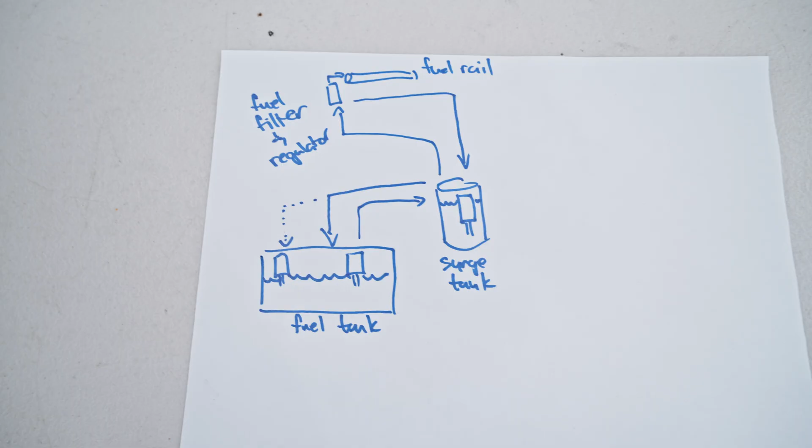So here's my quick diagram of what I'm trying to explain, how the surge tank kind of helps with the fuel cut issue. So pretend this is your main fuel tank, and this little water line is the fuel.

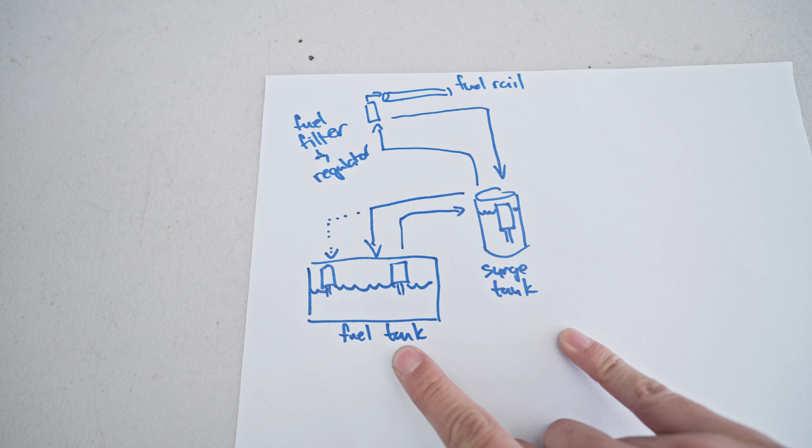That's fine and probably where it's sitting when you're static, but you can imagine if the fuel is lower and/or you're having high G forces left and right, that fuel kind of gets pushed to one side or the other. So these little boxes here are supposed to be fuel pumps.

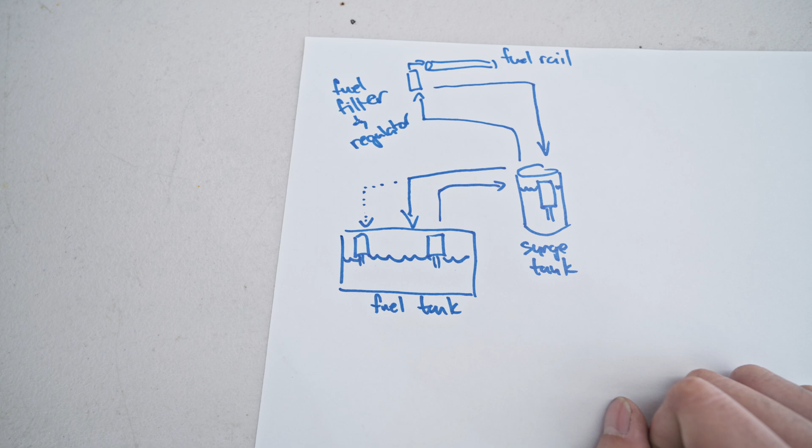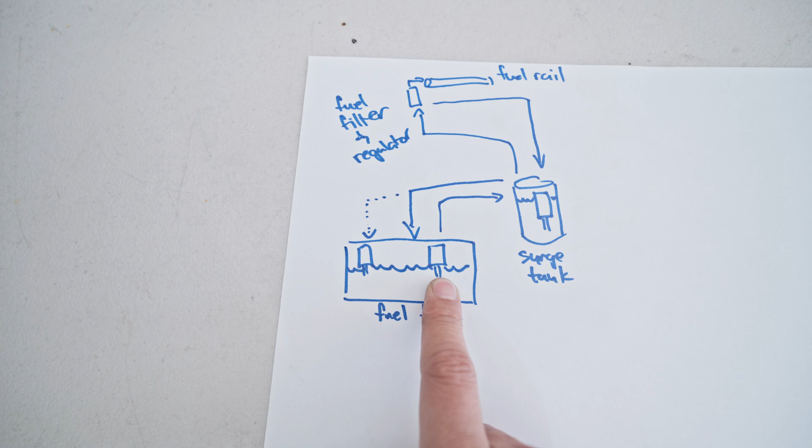Again, say if I make a hard right turn, all the fuel goes to this side, and then you may be at risk for not having any fuel supply to your main pump.

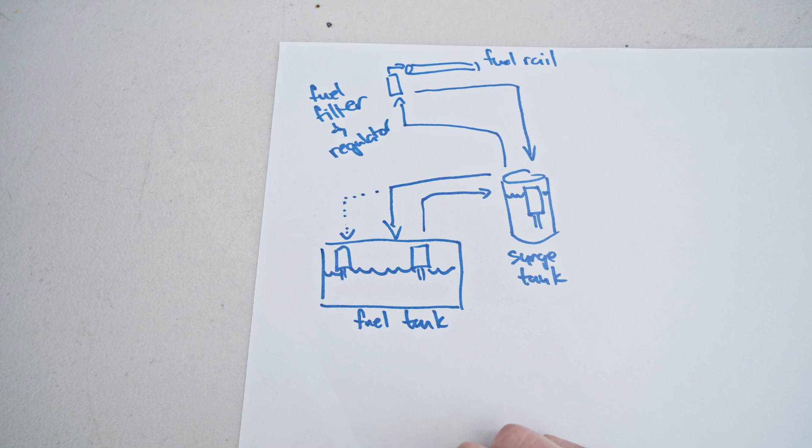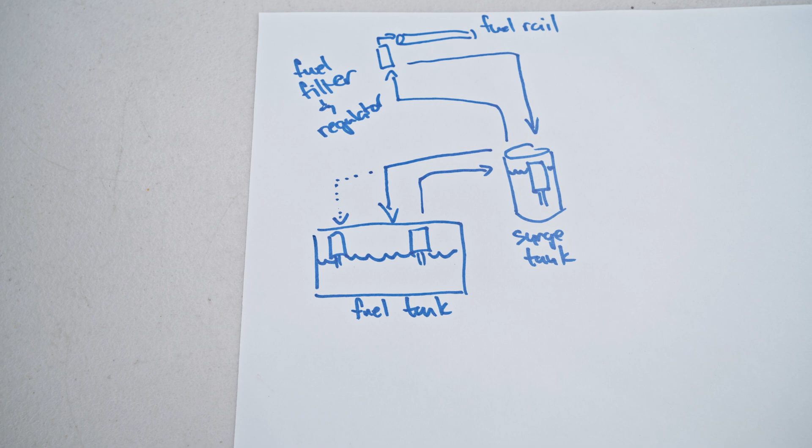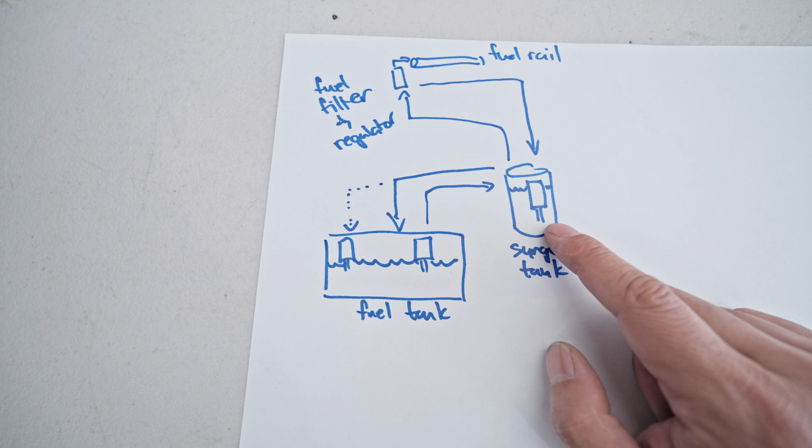So here I have the surge tank. You can see, from the previous videos and probably today as well, that it's a narrow — this is not to size, by the way — kind of container.

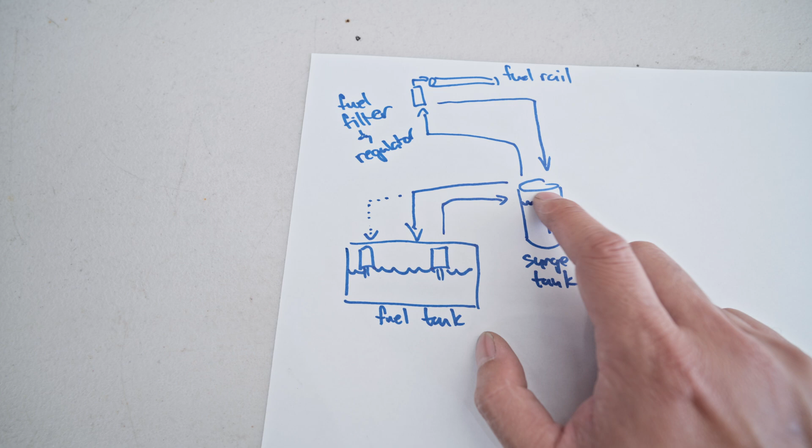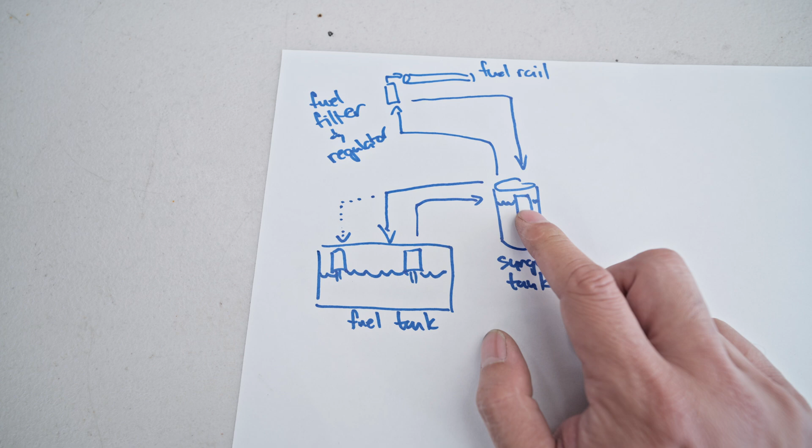And so if the fuel line or level is at the top, and since it's narrow, no matter how much G forces you move left and right, it kind of always has the fuel pump theoretically fully submerged, so you'll never be at risk for sucking up air or no fuel.

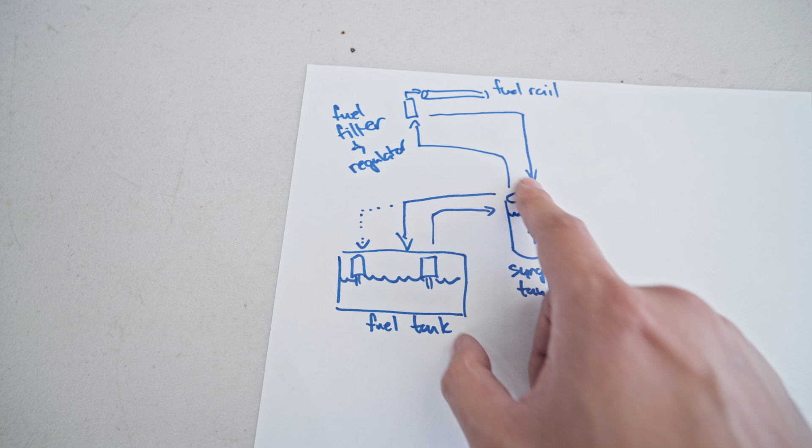So the whole fuel line system with the surge tank works like this: the fuel pump will instead deliver fuel to the surge tank. The surge tank will then deliver it to your motor through the fuel filter, regulator, and fuel rail. From the fuel pressure regulator, I believe the return line goes back to this surge tank.

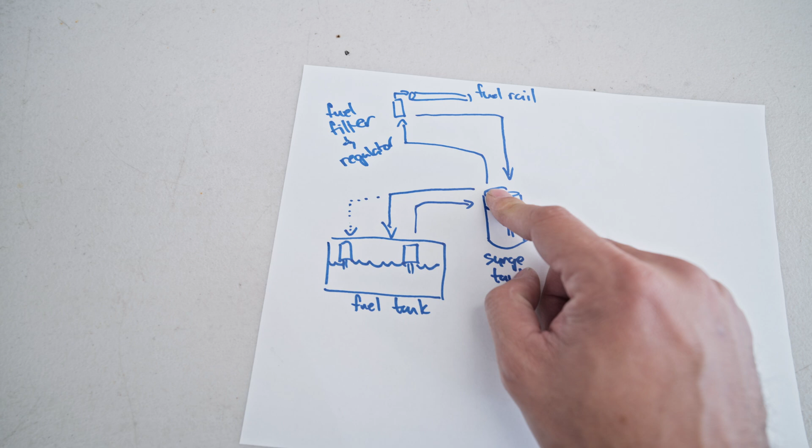Normally it would go back to your main tank. And so from the surge tank, there's an overfill or overflow port that goes back to your main tank here. That's why we have kind of like four ports on the surge tank that we got to plumb.

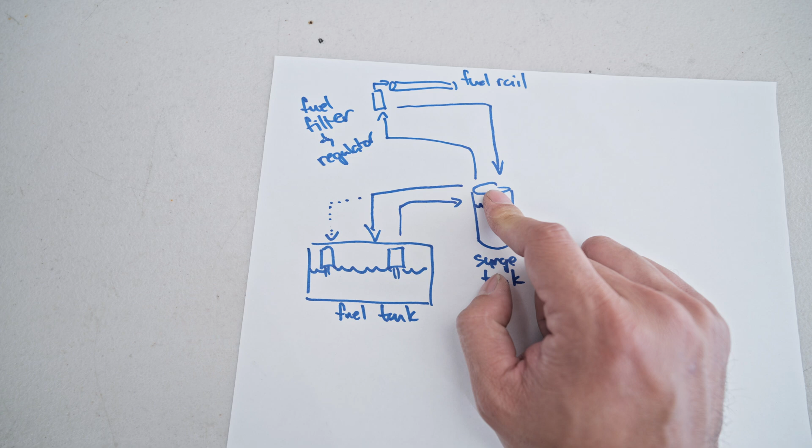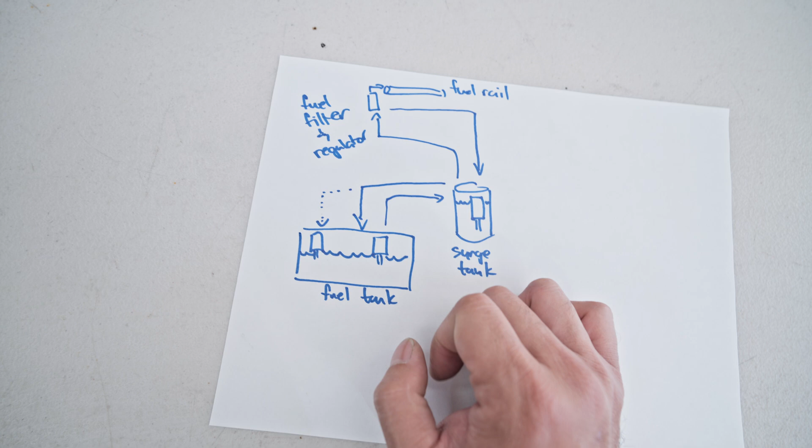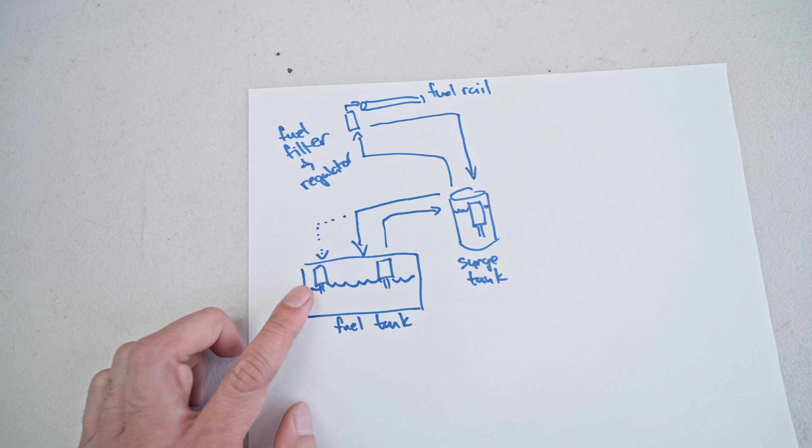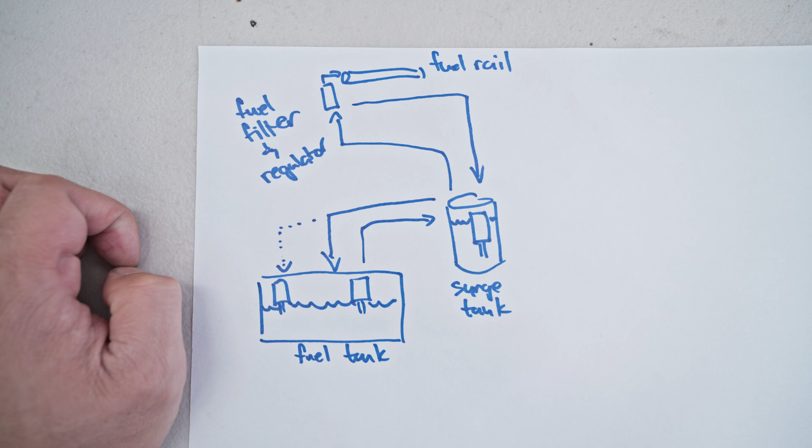But I believe the return or overflow from the surge tank might go over here. Not sure, but again, I'm not an expert — I've never installed a surge tank. I'm doing this out of necessity to try to avoid fuel cut on the track. But that's basically the idea.

So here is the cover for the surge tank. Here's the 4 ports that I was mentioning from the diagram. Kind of have it pre-assembled, not quite complete. I did buy this kit or the surge tank used, so not sure what it all comes with, but it should have everything I need to make this work.

So what I had to do, or where I'm at, is I bought a new fuel pump to match my existing one. I'm running a 450 liter per hour fuel pump. I think that fuel rate or fuel delivery is slightly higher than stock because I'm running E85, which demands a little more fuel flow.

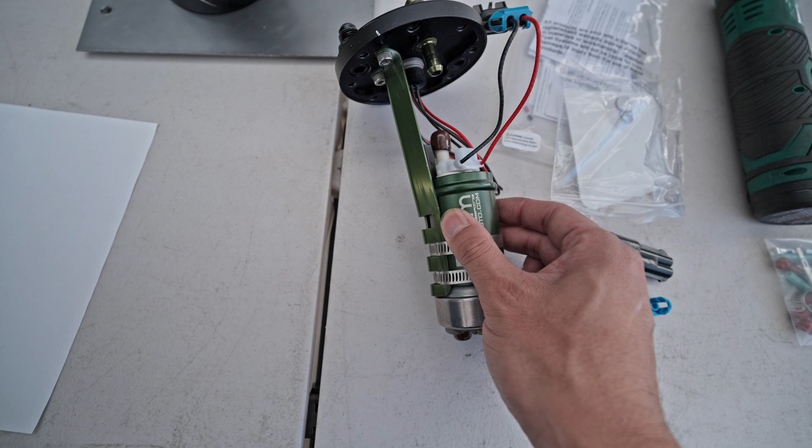So I got that already mounted. It looks kind of funny because for the fuel pump to be held onto this cover of the surge tank, it's by this little green piece here, I don't know what to call it. I put the fuel pump in the sleeve. I already had this in my parts bin, but basically the clamps hold the sleeve onto this piece that comes down, and this sleeve also compresses and kind of holds the pump from slipping out. So that's how the fuel pump is mounted.

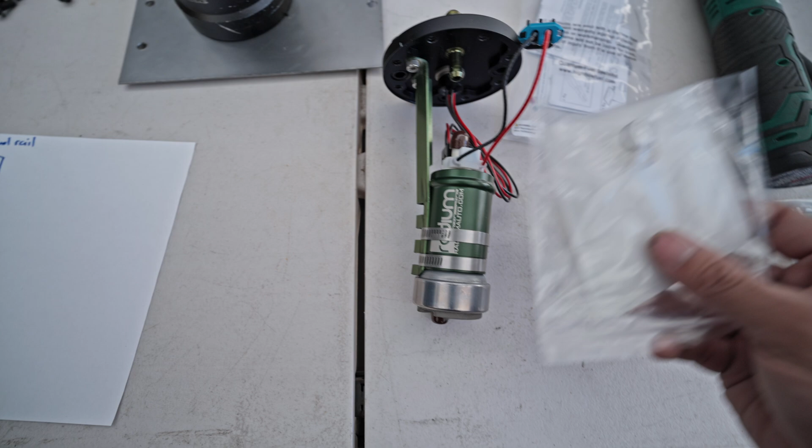So the fuel will get sucked in here. I need to put a fuel filter or fuel sock, I guess is what it's called, underneath here. Then I'm going to use one of the fuel lines that came with the kit, and the reason I want to use that is because this fuel pump is compatible with E85, and I'm assuming the fuel hose that it comes with does as well.

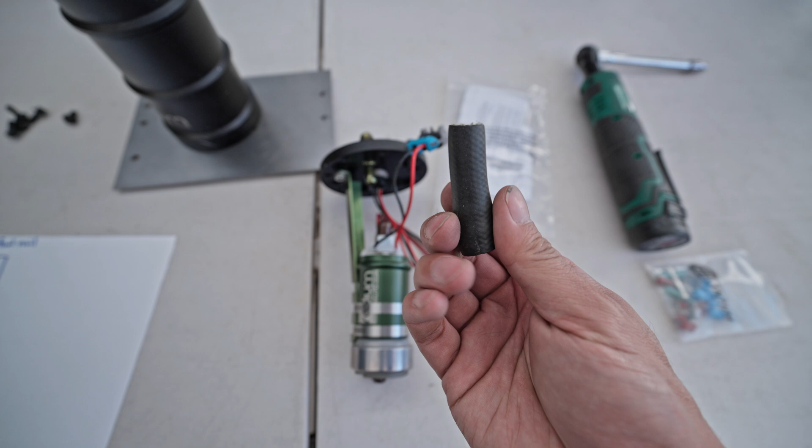If you don't have a fuel compatible E85 line, it basically gets super brittle. So this is the original hose that came from this kit when I bought it used, and the seller told me, hey, you should probably replace the fuel lines because they're not rated for E85, and over time it eats up this rubber fuel line.

So I'll have to put that on to there. That'll go from in between here to here, and then the port is what goes to the fuel filter. What else do I need to do?

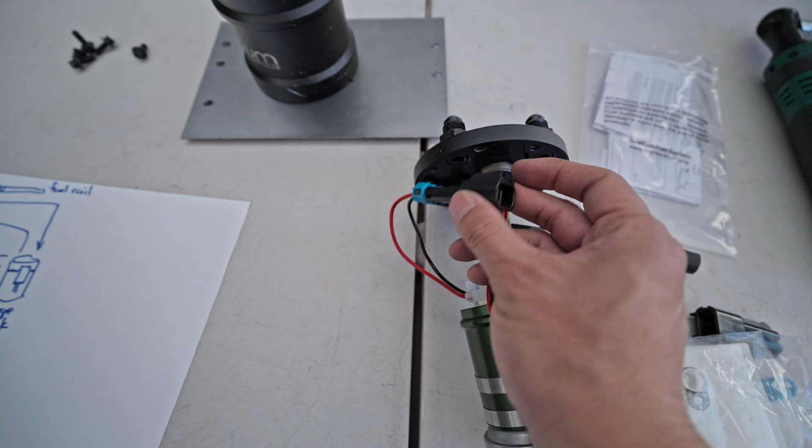Then I do need to splice and crimp some new connectors and harnesses. This connector that originally came with the kit is compatible for direct connection to the OEM fuel pump. I'm assuming when I bought it used, it was the OEM fuel pump, but the 450 liter per hour fuel pump has a different style connector.

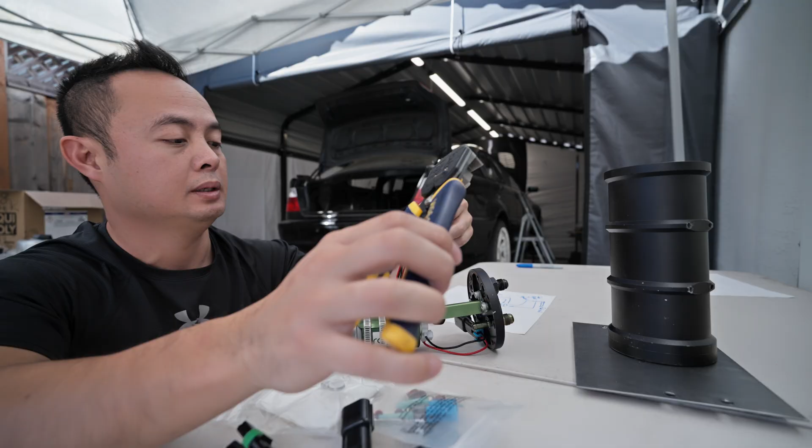So the kit did come with some connectors, so I'm going to cut this up, crimp some terminals, and put a compatible connector so it's kind of bolt-on to this. I mean, I could just splice it, I guess, but I'm trying to make this a clean install, and maybe the crimps are a little more reliable than just doing some butt connectors or whatnot. Don't want that failing during a track day. I hate cutting perfectly good harnesses, but it is what it is.

So this harness actually has 2 leads for each positive and negative wire going to the pump. It's probably because there's more than one trigger for the fuel pump on the other end of this harness. So I'm trying to see if I can crimp 2 wires with 1 terminal. I think the gauge of the wire is small enough that I'll be able to, but we'll see.

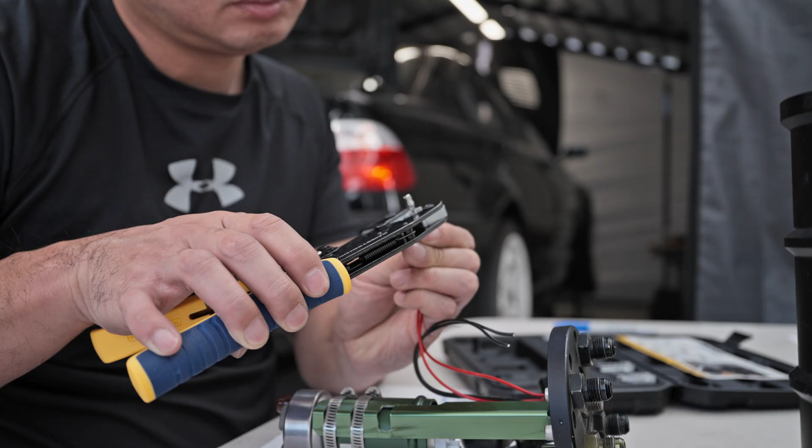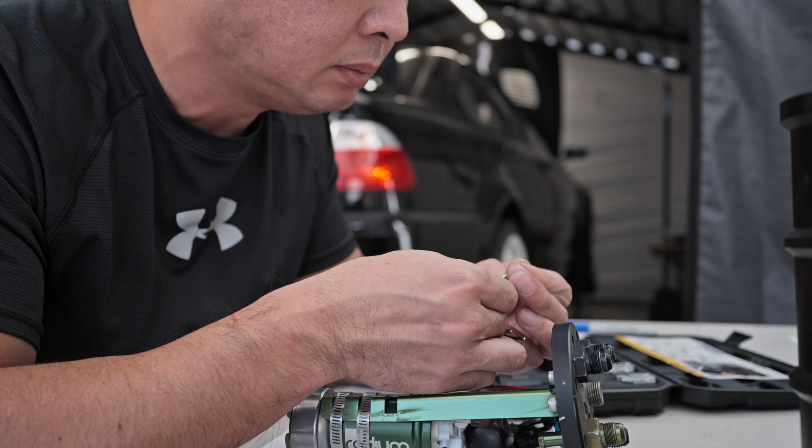Not bad. Okay, here's the final result. Actually, I had to do it a second time because I wanted to get those grommets on, and I failed to put them on the first time I crimped the terminals. They turned out good.

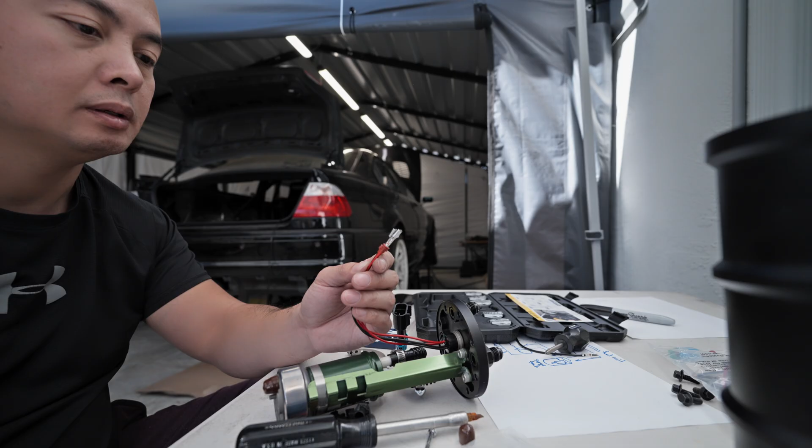Now I get to put the connector on. So if the connector goes here, red needs to go on this side. Get it in there. Do a little pull, make sure it's good. Do the other side. Why is this one so hard? Here's some positive clicks. And red goes with red. And make the connection.

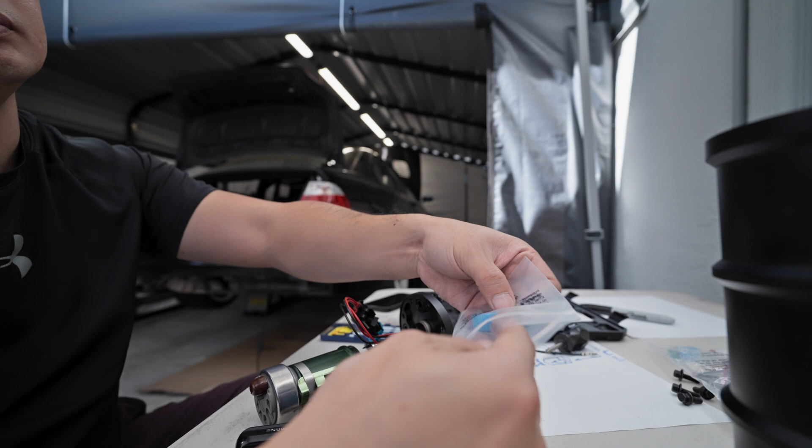Clean. Oh, I need to put that little locking piece in the back, I think. So it's just an extra security piece. There you go. I think that's good.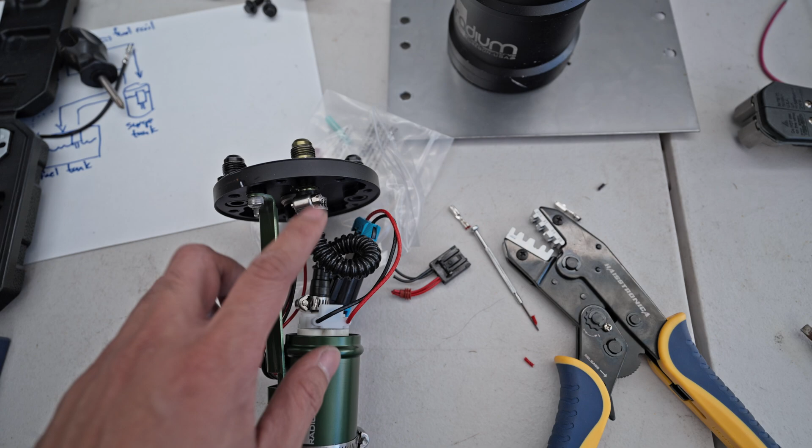Okay, so I have everything done. I have the sock or sponge for the inlet to the pump. Oh, I forgot to put one more clamp over this guy. I had to remove it to help with the ease of installation for this hose. This hose got a little bit of a bend. Ideally you have just one straight tube going from here to the outlet on the top of the cover, but I didn't have one that short, and you can't quite cut this one, but I want to use this one because it is E85 compatible. But so long as there's no kinks, I think that's fine.

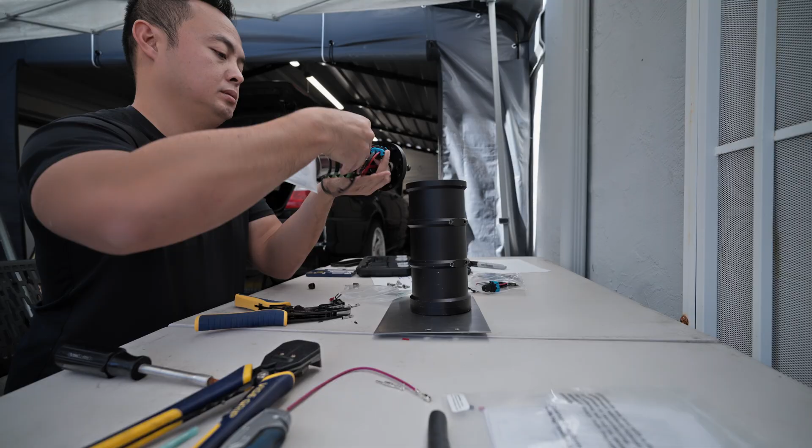I got the connector hooked up, so all of this will go in there. All of this goes in here. I guess the gasket needs to go around the harness as well. There you go.

Okay, I'll end this video here. Pretty sure there's a lot of video just on assembling that fuel pump for the surge tank, so I don't want it to be too long of a video. So I'll end this one here, but I'll continue to work on the next video.